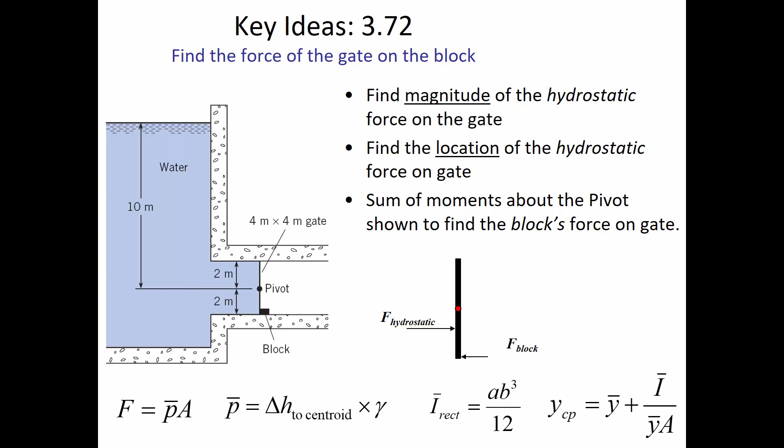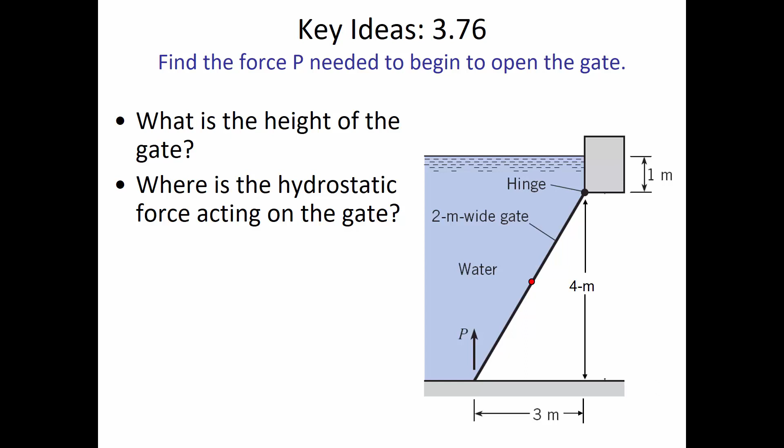Now you need to also determine where the hydrostatic force is acting on the gate. This one's not vertically oriented, so when you go through the process of identifying the centroid, delta H is usually pretty easy to calculate, but Y bar and YCP can be a little bit trickier, especially here because this 1 meter dimension they've given you is the vertical component of the distance from the hinge to the water elevation.

Once you find where the force is located, the moment distance isn't going to be the same thing as YCP. YCP is from the water line to the force, but the moment distance is just going to be from the hinge to the force. So you'll have to subtract out that segment length from YCP to know the actual moment distance acting in the counterclockwise direction.

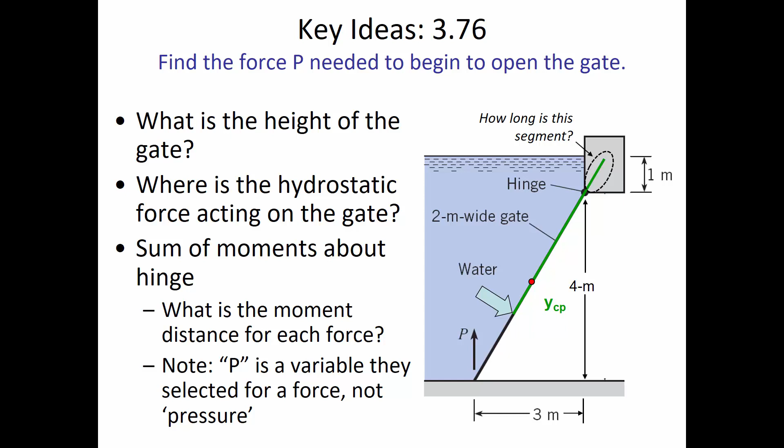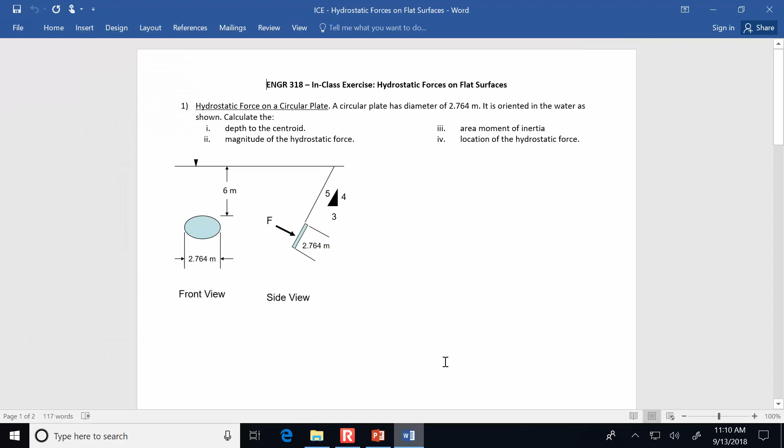All right, so to reinforce these ideas, I think it's one thing to hear it, but it's another to do it. I'm going to stop talking because I think that's when students learn the most, is when I'm not speaking. I'm going to give you an in-class exercise. It's got a front side and a back side, some problems where step by step I'm going to take you through what you need to do to find these hydrostatic forces and so on. You're welcome to work on this with a classmate - in fact, I prefer it. I like it being noisy in the classroom when there's an in-class exercise because I think noise means learn.

Oh, that's the wrong one. You don't want - no, engineering economy. Yeah, there we go. More. That ought to do it. There we go.

All right, so circular plate. Let me go back to the geometric parameters for a circular plate - that was earlier in the notes. Let's just go get the area moment of inertia, and we'll pretend like we don't need to know the area formula. Let's see, where is that? There we go. All right, so this one's circular, so let's get the I value for a circular shape - it's pi r to the 4th divided by 4.

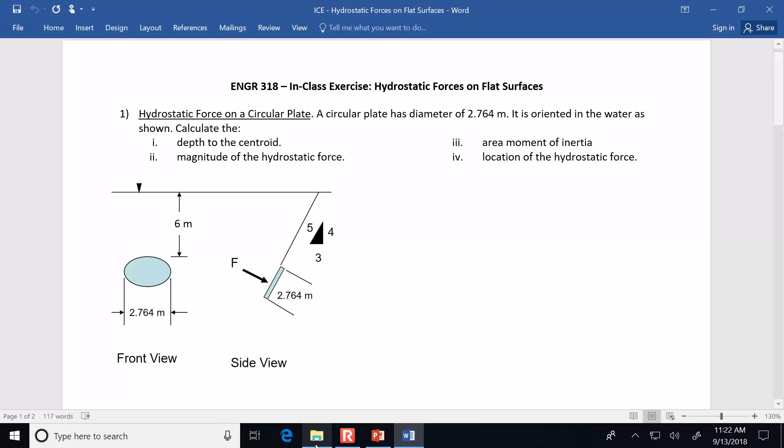Yeah, I'm sure in my case it wasn't the teachers that was the problem. It was me. Yeah.

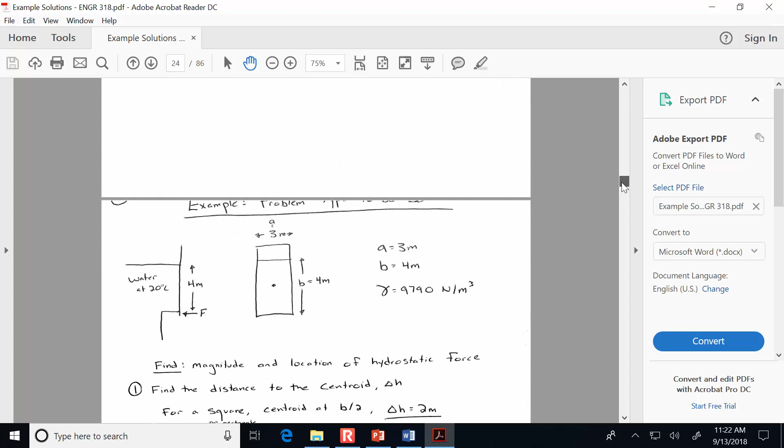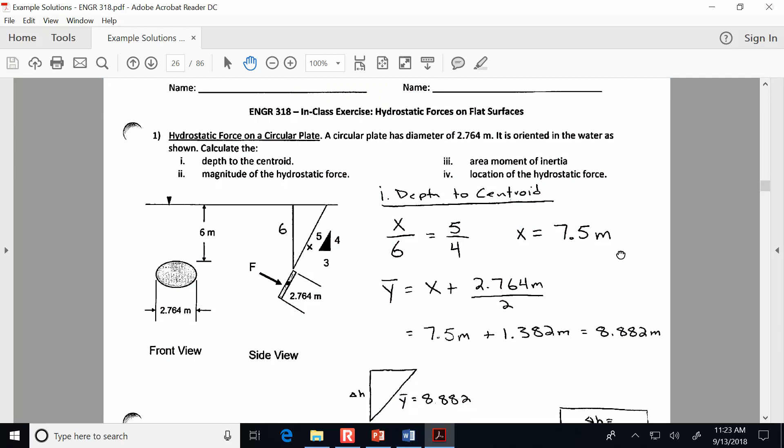Okay, up on the screen right now, I've got how you find delta H. So it's all of the geometry backflips you have to do to find the inclined distance to the edge, then adding on the additional inclined distance from the edge to the centroid, which is just half of the diameter.

Sure, you can definitely use the angles. You don't have to use the similar triangles. Really? Might be cosine when you're supposed to do sine. Yeah, I always have to kind of refresh my memory on that.

Let me scroll down to the rest of the solution now that you've seen how to calculate delta H.

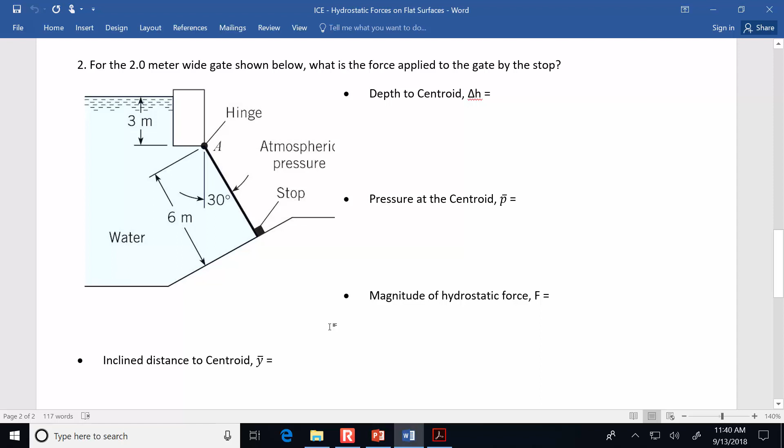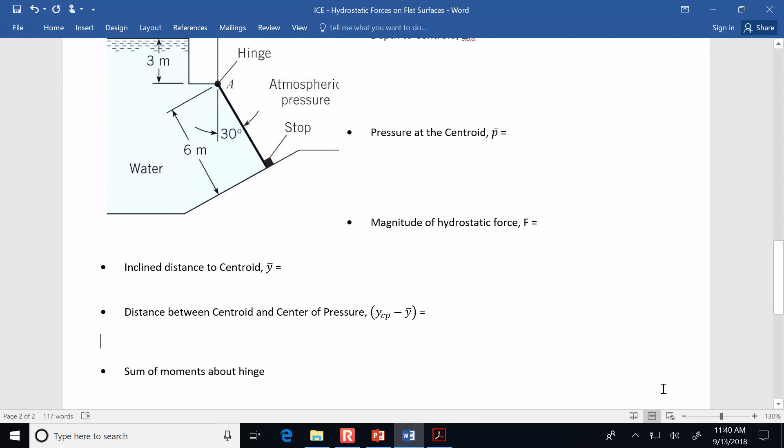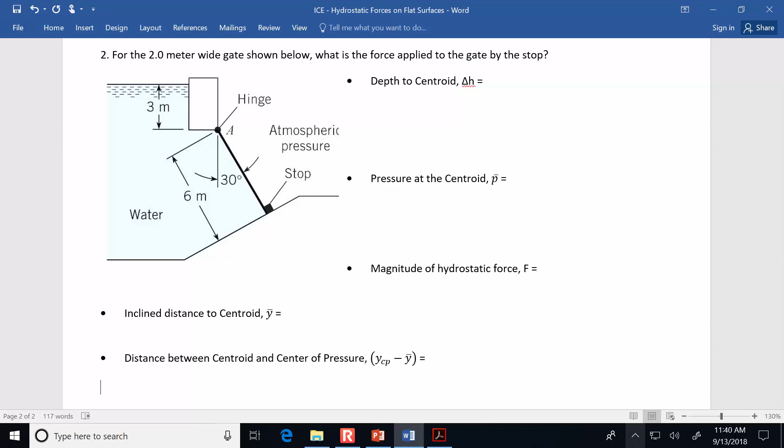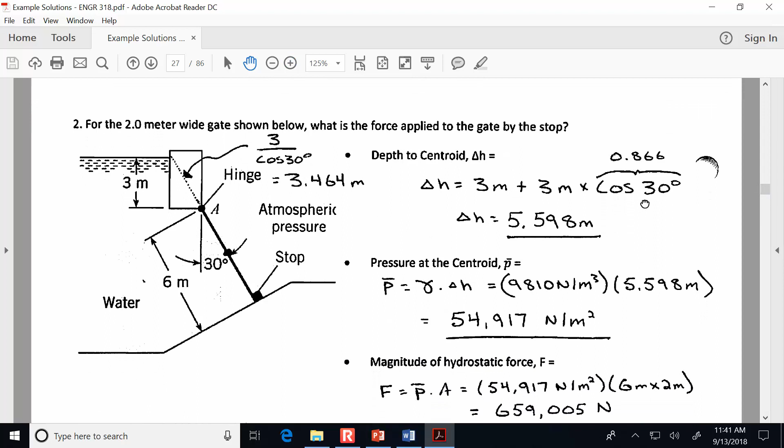So to the centroid from the hinge, 3 meters, right? So it's only inclined 30 degrees, so most of that distance is the vertical, right? Sine of 30 is 0.5, cosine of 30 is 0.866. So by inspection we can see most of that distance is going to be vertical, so we should use the cosine rather than sine, because cosine 30 means 86.6% of that length is in the vertical direction. So if you can never quite remember the fundamentals, like your rhymes of sine versus cosine, just multiply it out and see which is the most reasonable.

Once you find the delta H, you're also going to need to calculate the pressure at the centroid, and then the magnitude of the force is dependent on the physical dimensions of the gate. Here they told you it's 2 meters wide.

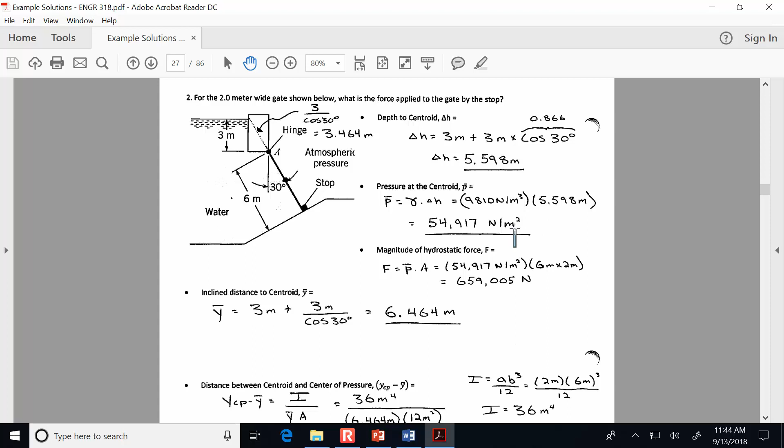I didn't write it on the board, but many of you remembered already that the area moment of inertia for a rectangle is the width parameter times the height parameter cubed, divided by 12.

Now, that's also going to apply if the longer end was turned down. That's still going to be the same - your B is always your longer end, correct? No, I'm glad you asked. So B is the vertical one, always. And the way I remember that is it's the vertical components that matter the most to us in the hydrostatic equation, because we're going up and down through the fluid. That's how the pressure accumulates. So you cube the vertical dimension rather than the horizontal dimension. Yeah, it's not necessarily which one's longer - it's just coincidental in this case that it's longer than it is wide.

So here, anybody want to explain why I suggested finding the distance between the centroid and the center of pressure rather than just leaving it as the y bar? Why is finding that distance more useful?

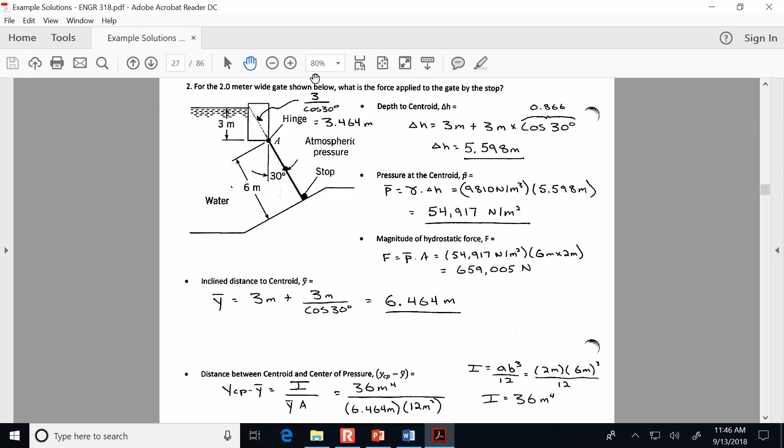Right, for the moment distance, you're going to use it. It's not the only component of the moment distance, but if you add it in here in this little sketch, I kind of show what that gap distance is - the distance between where the centroid is and where the force is applied. And again, the force is perpendicular to the orientation of the plate, so it's got an upward direction.

And this is a net force. It's not like there's just one hydrostatic force out there. What's really happening is there's a distribution of pressures acting over an area. So we could break it up into little segments - we could make like a 1 centimeter mesh, and each mesh point has its own pressure and its own little area, and we integrate it.

And we would get the same thing as if we go through this process and find the single resultant hydrostatic force. So all we've been doing is finding the resultant hydrostatic force and its resultant location, which is equivalent to the real deal: there's a little bit of pressure at the top of the plate, the pressure is gradually increasing, and it's acting over that plate in a linear way.

So our moment distance would be the 3 meters plus the gap distance for the counterclockwise rotation, and then from the hinge down to the force of the stop, 6 meters.

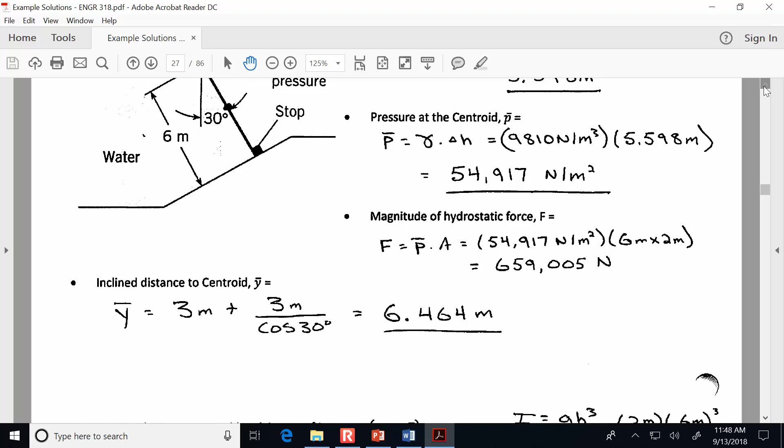Let me just interject with a note about precision. Don't round off too early. For example, if you rounded off this delta H to be just 5.6, then you're not able to report the pressure to anything other than the nearest thousand Newtons per meter squared.

So although I write down 5.598, it's actually 5.598 and more, and I keep all those extra digits in the calculator so that when I multiply it by the unit weight, I can report the pressure to the nearest Pascal. So I have 1, 2, 3, 4, 5 digits of precision because that and more is in the calculator.

So the warning is don't round off too soon. And if you write, it's okay—I don't want you to have to write 16 digits on the paper—but it's just kind of taken as a given that you're going to keep all of that precision in your calculator as you work through the solution.

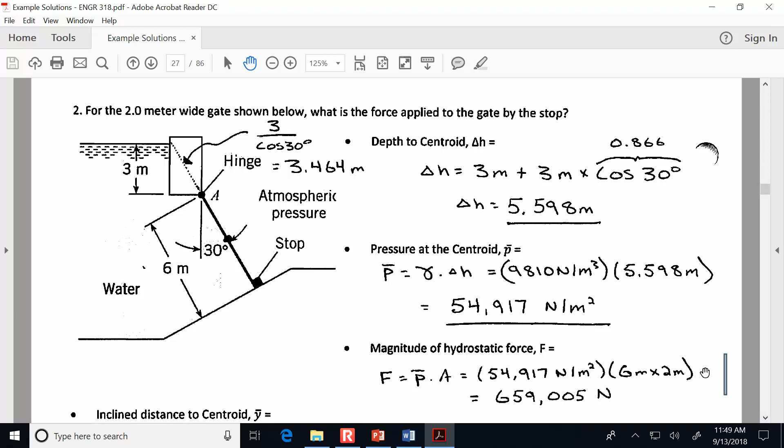All right, we do have one more example we're going to work through before we finish for today. I'll just pause for just another moment to make sure everybody's got this.

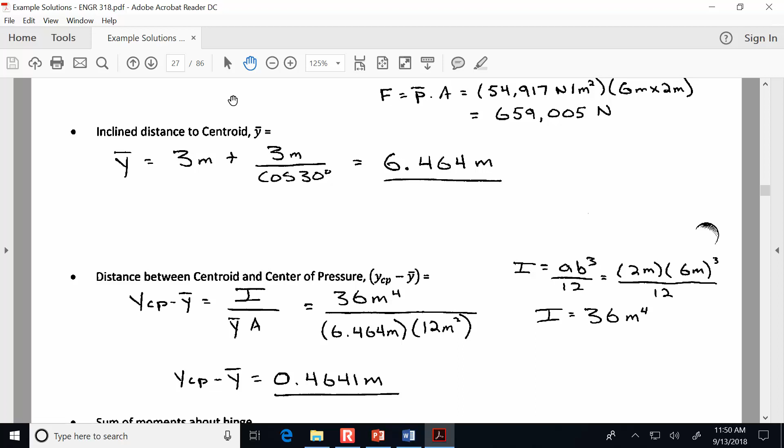Yeah, I was just wondering, for your YCP, why was Y bar added? Or do you need to add Y bar to that? Good question. If we wanted to know YCP, then I would have to add Y bar.

Yeah, so let's go up to the drawing here. I'm going to just gesture at the screen here. So let's say here's the hydrostatic force—it's below the centroid. So Y bar is the distance all the way up to the water line. So if I wanted to know YCP, then yeah, I'd have to, in the formula you're asking about, move that to the right side of the equation.

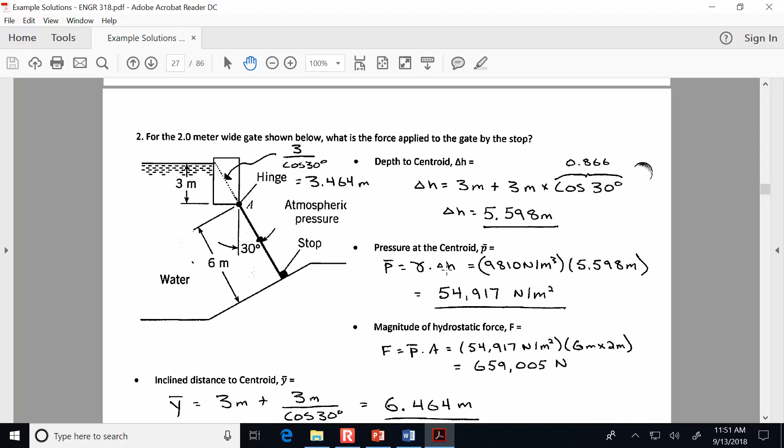What I'm saying is it's actually not so important how far it is up to the surface, because ultimately what we're going to be doing is calculating like a moment analysis about this hinge. And so it's how far away it is from the hinge that I really care about, not how far it is from the surface. And so by having YCP minus Y bar, the result of that is how far apart this and where the force is located is. So that's why I kind of rearranged the formula you're asking about here, right?

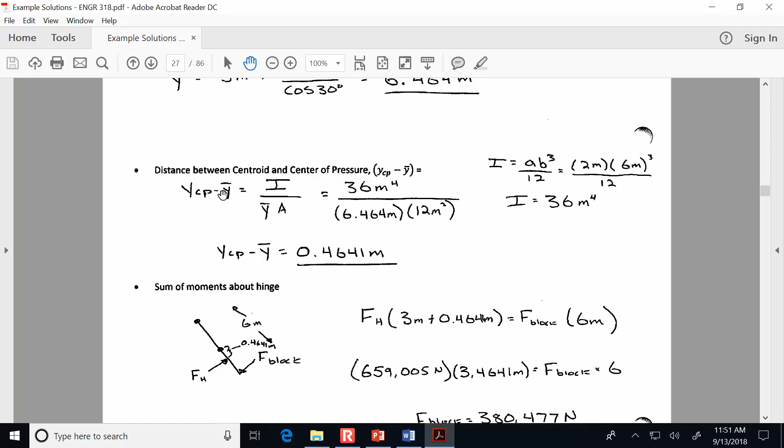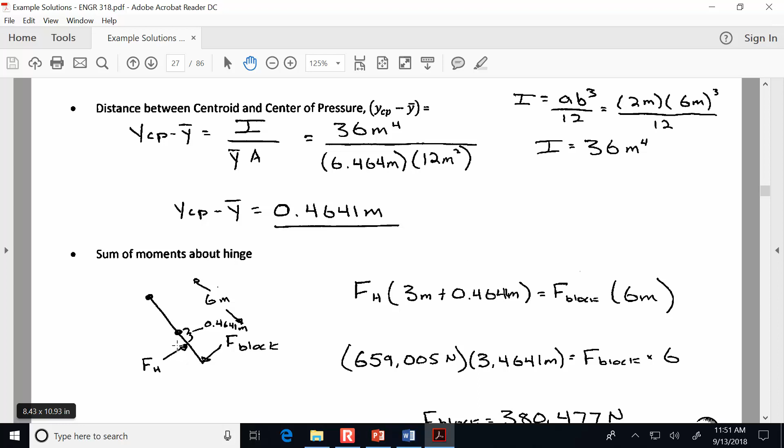Yep, exactly. So YCP would have Y bar on the right side of that, but what I really want to know is—see where it says here 0.4641—that's the distance between the centroid and the point of application for the resultant hydrostatic force. Does that answer your question? All right, I'm glad you asked it because it's an important point.

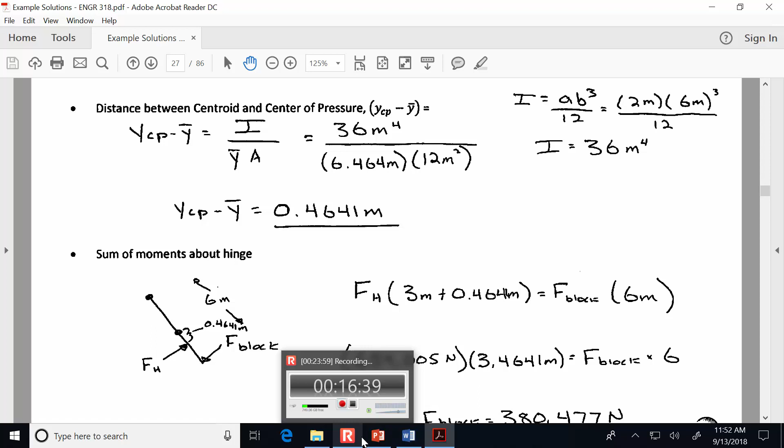Are there other questions? Okay, great. So you can hold on to this, and hopefully it'll be a useful resource for you as you work on the homework that you've got on your plate. Let's also now look at another example that makes a different point.

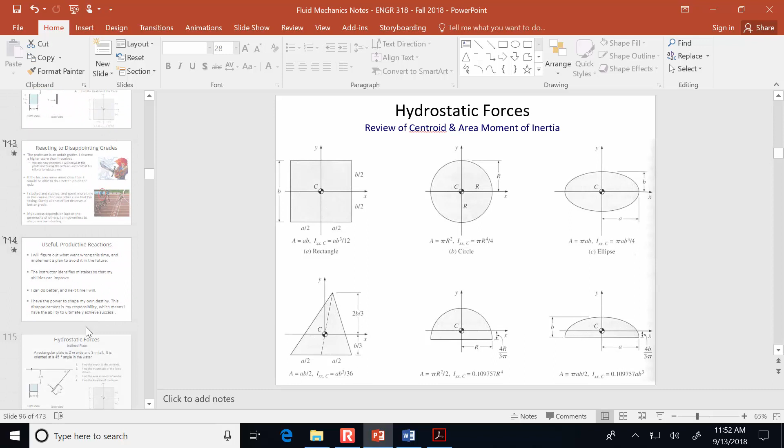We can use the same techniques we've used so far to answer this. The equivalent hydrostatic force is the pressure at the centroid times the area. Where's the centroid of this? Well, pressure at the centroid is delta H times gamma times area. That will tell us the force acting from above.

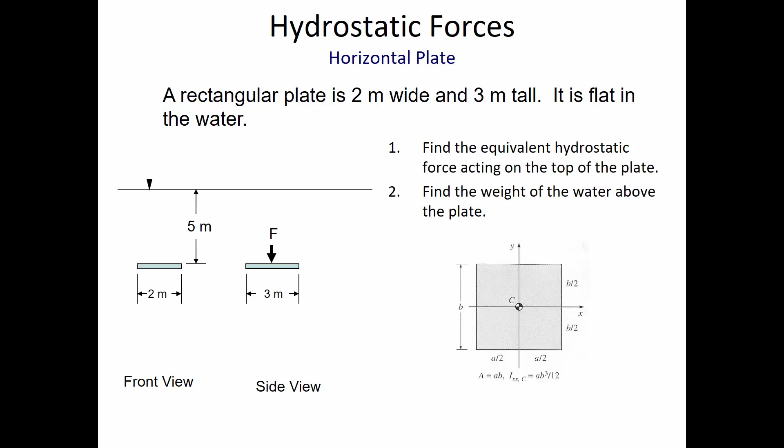Just for those who are following along at home, there we go. Here's the first part. If you do the calculation, you'll get the same thing: 294,300 newtons. This is going to be really important to us when we start working on curved surfaces.

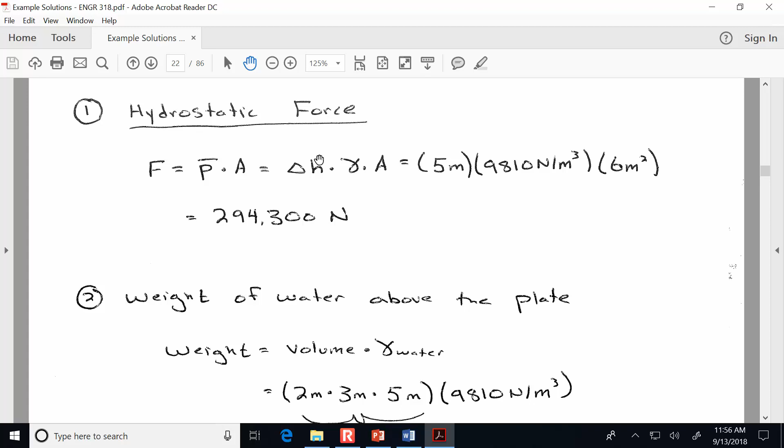And what this example is meant to demonstrate is that the vertical force is equal to the weight of the water. So the hydrostatic force can be broken up into a vertical and a horizontal component. In this case, there was only a vertical component because the plate itself was horizontal. The vertical component of the hydrostatic force is equal to the weight of the water above the shape in question.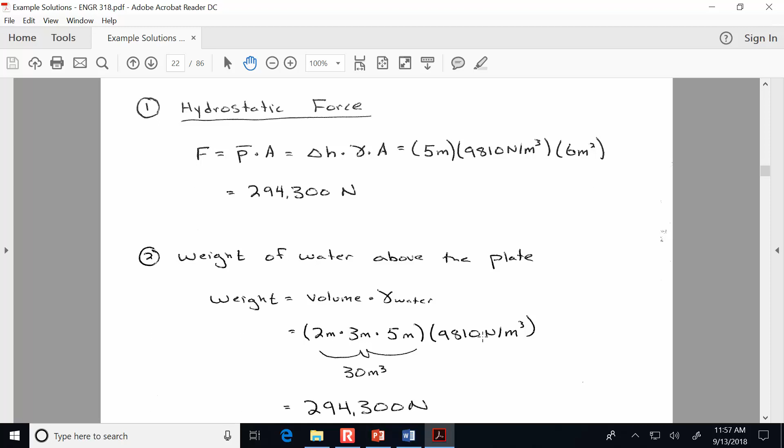So it seems really straightforward, but when we start talking about curved gates, it's less obvious. That's why we start with this example - it makes the point that the vertical component of the hydrostatic force is equal to the weight of the water. I should type that in as a conclusion here. This is what you're supposed to draw from this example. So the weight of the water is equal to the vertical component of the hydrostatic force.

And to be continued on that. The application of it is to be continued. That's all I've got for you today.